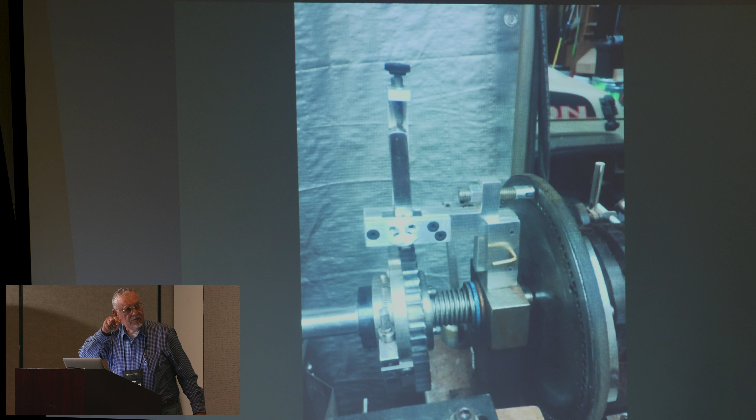This is the actual pumper that Steve had made. If you notice right there, that is a bearing riding against the index wheel. Talking with David Lindow later on, he said that index wheel has at least a 10 thousandths run out on it. That's not a lot, but it does make a difference.

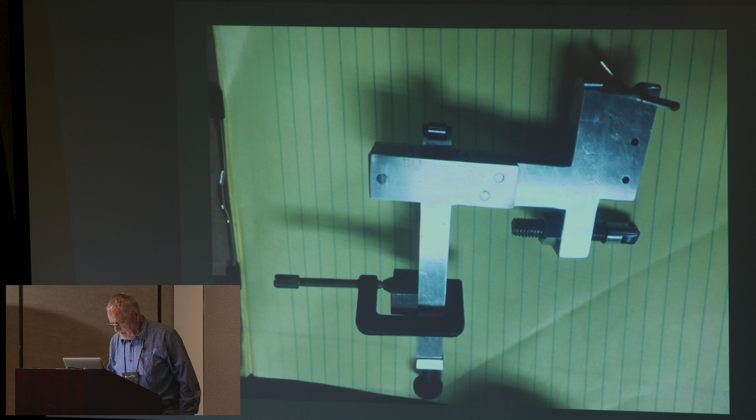This is the pumper arm that Steve had made. So we decided to try something different at David's suggestion. He said maybe it'd be better if you actually pumped on the end of the shaft rather than on the wheel. So a fellow turner named Pete Holmes made this pumper, and it rides on top of the headstock on a Lindow-White machine, with a rubber that goes down and hits on a rosette installed on the shaft.

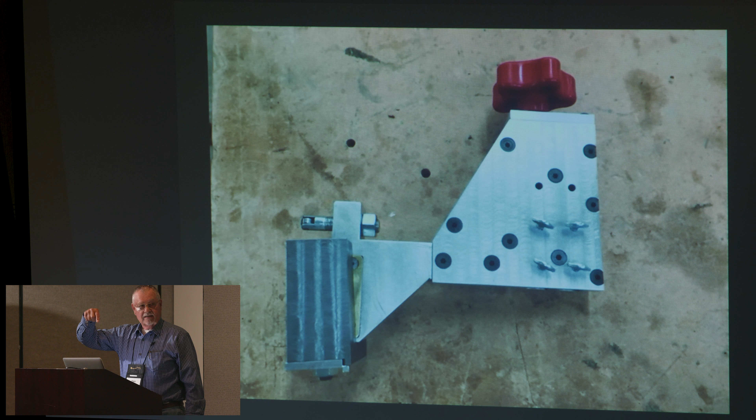This was Pete's idea, on the top. David suggested maybe I try it on the bottom. So this is mine, riding on the top, and it did work, but it has some problems because I did not use a bearing—I used just a piece of nylon to rub against the wheel.

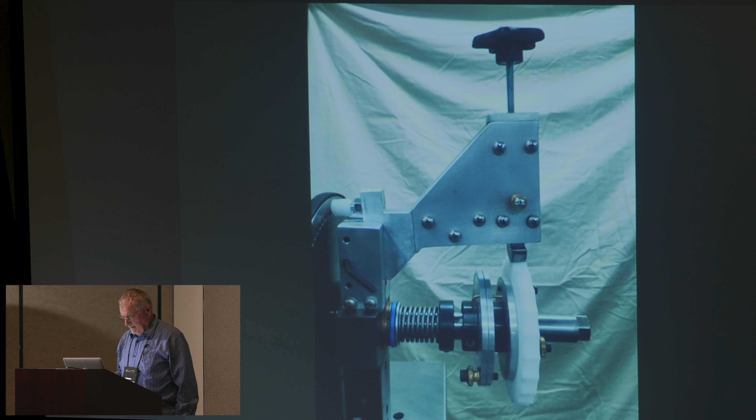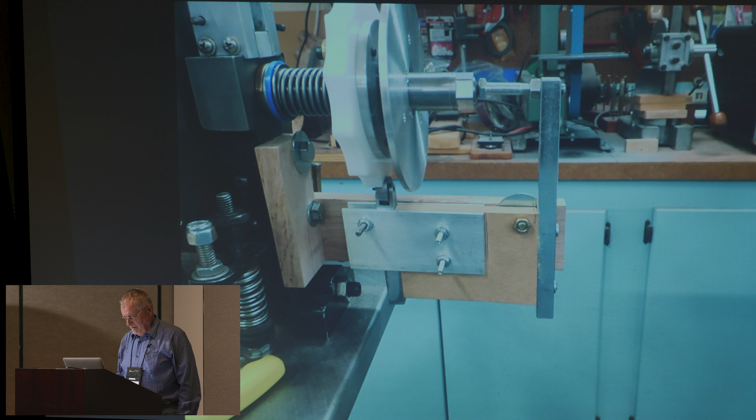I took David's suggestion and tried it on the bottom. This was my first try with plywood, and I was amazed it really worked. I called Martin, and he came over and said, wow, that's something, isn't it? This was in January, and I was getting ready to go to South Texas on vacation. When I got back, Martin had made one to fit on the bottom, and it worked too. It's been modified somewhat since then, but it did work.

If you notice right there, Martin made a rubber where the top flexes up against the rosette, so it stays flat against the rosette at all times, rather than riding on just one edge or the other as the rosette rocks back and forth.

This is the frame that Martin made to hold everything. This is the rocker arm, and you'll notice a series of holes right there. Those holes give you an opportunity to change your amplitude just a little bit, not a lot, just some. I think we've decided you don't really need them, but at the time it seemed like a good idea.

This is mine, this is the way I did it. If you notice, I've got a roller bearing to ride up against the rosette, and it does make it ride a little bit smoother because you have less friction.

This is something I came up with, I call it my indexer arm, and I'll show you what that does in just a second. This here is a rosette that I had a friend make for me. He had a CNC router machine, and I told him what I wanted—a rosette with 24 bumps on it, very similar to one of the Lindow-White rosettes. He made it, and after about the third try he finally got it, and it really works pretty well.

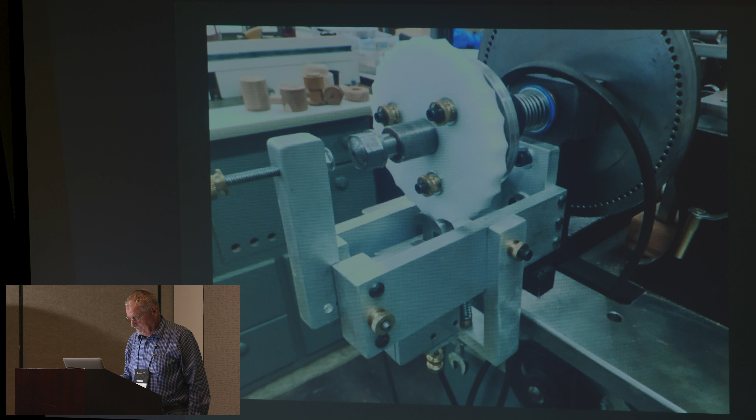This is the frame I made, and there's the holes I drilled into and tapped for the bracket. This is the pumper arm again with the different holes for the different amplitudes. If you notice, they're both made a little bit different because we had a little different idea how to go about it. This is my bracket that I made, and this is simply a hardware store spring.

This is the very first box I made, and I did several experiments trying to figure out, I've got this machine, what am I going to do with it? I finally came up with, I could actually do a basket weave on an oval-sized box. This was my goal, as I've not seen too many people decorate the side of an oval box. You can make an oval box and do all kinds of things with it, but putting a decoration on it is a little bit complicated. I tried about 6 or 7 different things, and none of them came out very good.

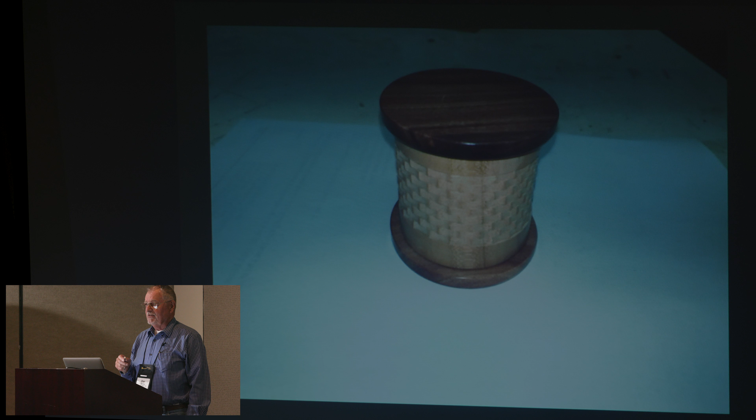I could do this, or I could make a squiggly line, and make parallel squiggly lines. That was kind of neat in a way, but I really like the basket weave.

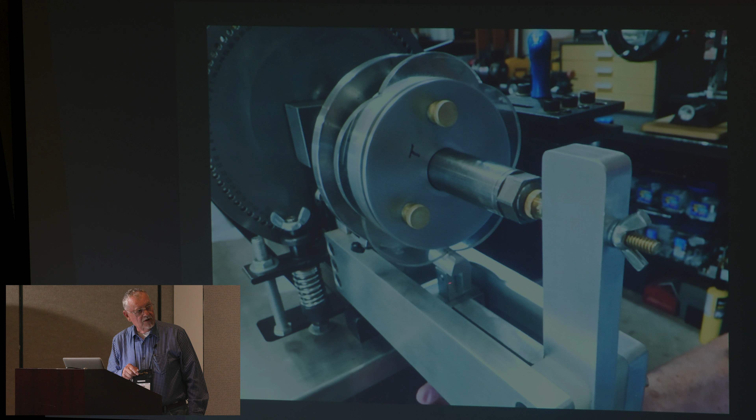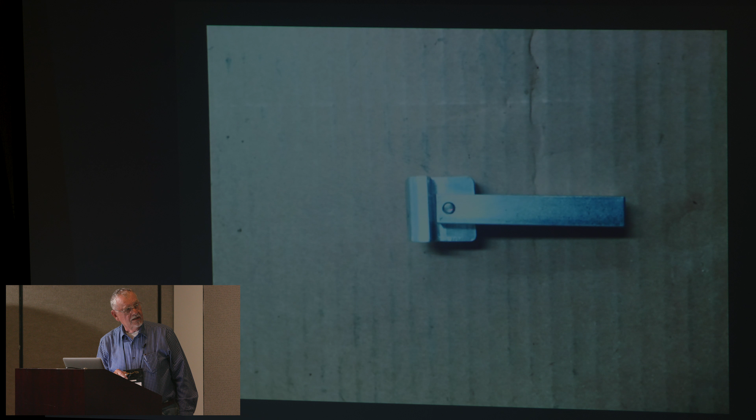Okay, this again shows the flexible head rubber down here to stay in contact with the rosette. This is on Martin's machine. This is the flexible rubber—it uses a shoulder screw that goes down in there that allows that head to flex. Just another view of the same thing.

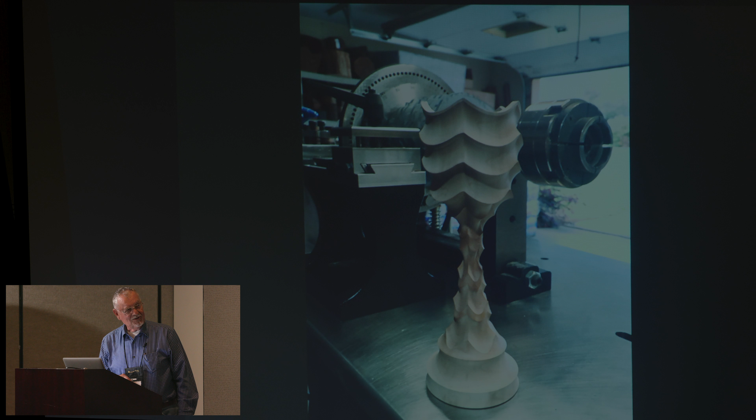This is Martin's first piece. It's different, but that's what he proved you could do with it. You can see such a long, graceful line there.

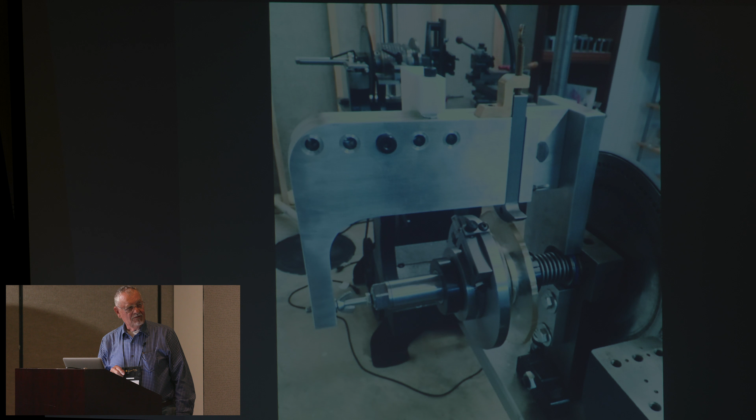I talked with Steve White some more, and this is Steve White's iteration of how to do this. He put his up on top—it's quite an apparatus, but it does work. This turned out to be a collaboration of a lot of people's different ideas that we put together in different ways, but it does the same thing: it allows you to have that much longer stroke on your pumper. It was a fun thing to do, spread out over a period of about a year. I think we started last year about this time. And I think that's the end.

Any questions? Can you use any rosette basically with that? Yes, you can use most of our rosettes. The only difference is because your arm is moving so much, it will almost go off the bearing, or the rubber will go almost off the side of the rosette. That's the only problem, because the arm is moving so much. But it works, and a roller bearing really helps a lot because you reduce a lot of friction.

Thank you very much. Yes—oh, you could get almost 3/8 of an inch. And on the Lindow-White, that's about as much room as you've got between the barrel and the bearing holders there. Thank you.